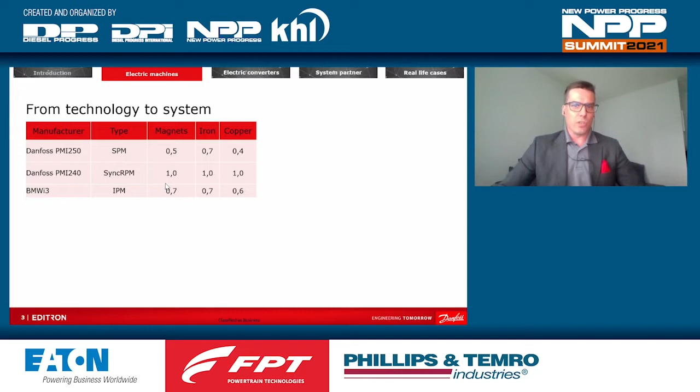So just the basics of what you can see here: the first one is a surface magnet motor where the magnets are on top. The second one is an area where you really use the iron reluctance, and the BMW one is also a similar type to that.

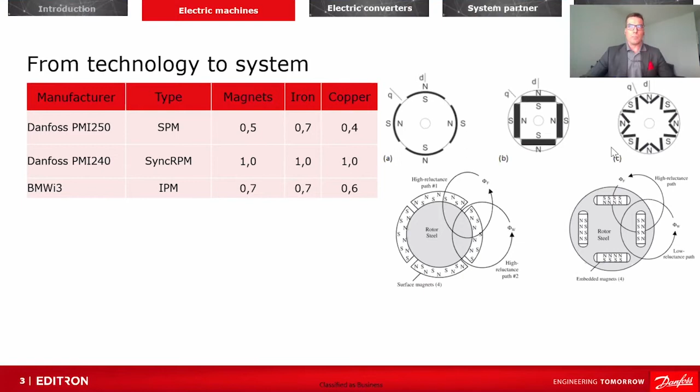When we look at the different behaviors, you can see there is a peak power that is different. As mentioned, the surface mounted permanent magnet machine has the highest peak power for the torque, and then it goes down relatively according to the positions you can see here. Now you could easily say the surface mounted is best if I want the highest peak and don't need the high speed area, but the high torque area.

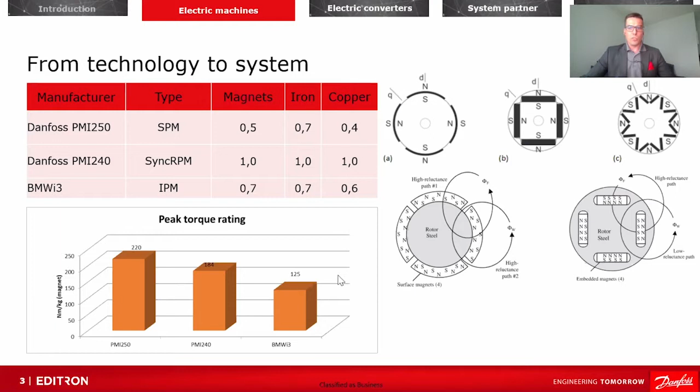Now when we look at the PMI 240, you have the highest area of speed, and also the peak torque through the synchronous reluctance. So you don't need the gearbox if you are able to utilize the system, but you easily then need a bit more current to get all the areas there, so you might need more power electronics to support that.

But the actual system, if you think about it, how many moving parts you have there - that's the simplest one, and it can be used in quite many applications as such, and it's easy to assemble because there's no need of mechanical gearboxes. Of course, there is a reduction gear as well.

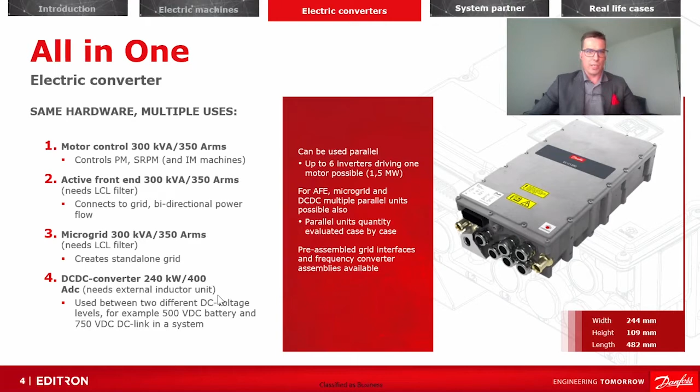This is just to deep dive a little bit into what kind of technology we would need and what the benefit of silicon carbide will bring us. In this particular device, we don't have active silicon carbide components - we have silicon carbide diodes, and we will come down to that point.

Silicon carbide is commonly asked about - should I use it? It's actually the one everybody is speaking about now, and the typical question is whether efficiency is the reason one would use it. At Danfoss, we have a capability of vertical integration - we actually have our own power modules and the capability to produce our own power modules. So we are at the moment the only company capable of starting from the silicon up to the full system. We really deep dive into these areas in the company.

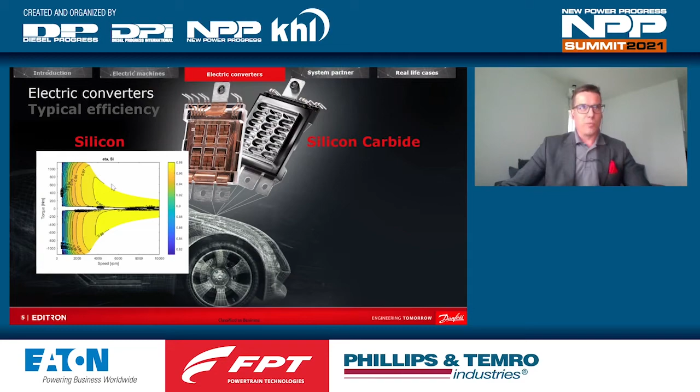Let's start firstly on the standard silicon. So we are talking about this area here, which is the efficiency area where it's typically used. You can see the standard silicon is about 98, 97% efficiency, what you can have. And then it drops down when we go lower in the speed which we are using.

Now when we have a silicon carbide addition there, you can see that the area of 98% efficiency is larger. So we can say, yes, it is better - it's clearly better for the area, and it's also larger for the bigger efficiency area. Now one could say, okay, let's take the silicon carbide because we save in efficiency. But you need to remember silicon carbide is more expensive because it has carbon added to the silicon, so it's more expensive to produce.

But of course, you get a little bit more efficiency there. If you have a 100 kilowatt system and you save 1% unit, it means you have 1 kilowatt difference. So does it pay back in your application if you are only basing it on the efficiency difference of these two products? Should you go there? The answer is typically no - the efficiency of the single component is not enough to justify it. You need to understand where to use the actual part and how to utilize the benefits.

And that's when we come to the passive components - that's the actual area where the value of silicon carbide comes out. Because we have the higher efficiency, we are capable of increasing the switching frequencies of the switches we have there, and increasing the switching frequency will allow us to use much smaller components on the passive side.

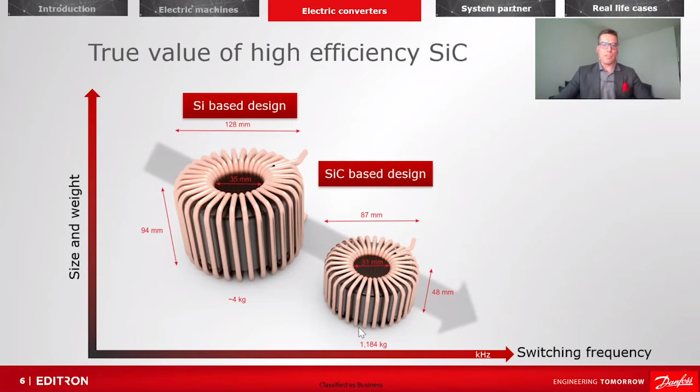What I want to say on these ones, to get the best system for your applications, you really need to find a partner that knows these technologies, can support you with the technologies, and analyze the duty cycles of the systems to come.

Okay, I'm back, as one famous movie star has been saying. Sorry for that, I have a big storm here, so it's blocking the network a little bit.

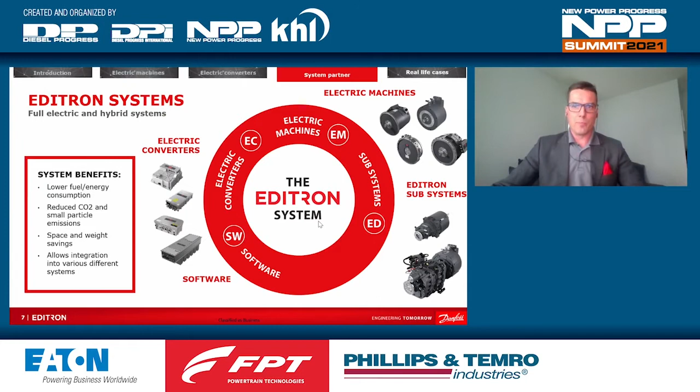But as I said, the systems are the important one, and the partner for the system is really, really important to select - to be the one who understands the electric parts and how to utilize the components and the right technologies behind it to come out with the best total cost of ownership for the end customer. This is a key to success in this area, because there is no one technology that wins it all. That's important to remember. Okay, let's go to some real life cases.

As we want to understand the full application and really understand what we can do, we have a capability in Danfoss to build full machines. We have application development centers on all continents, one in US, one in Europe, and one in China. And in these ones, we build actually full machines and change them to use any of the technologies from Danfoss.

One of these is a wheel loader that we changed from hydraulic version, diesel driven, to electric driven, where we also drive the hydraulics with electric motors. This is the most modern, really the brand new version coming out from the market so we get a fair comparison. I will not go into details.

You can find this machine, it's publicly known. Any customer, any partner can come and see. And when the world is allowing it, you can visit - this is in the Nordborg Application Development Center - and you can even get a test drive and understand. We show openly all the technologies that are used there and how it is built.

But what is important to understand, when you select the technology correctly, the actual power utilization, the energy consumption of the system really comes down. And also that it's already possible to build systems where you can operate a full day of duty cycles with this kind of machine.

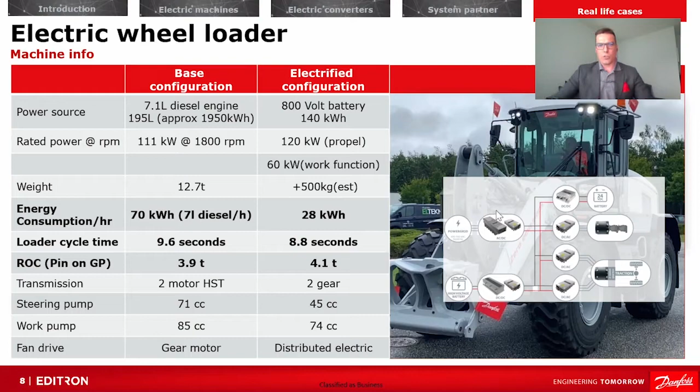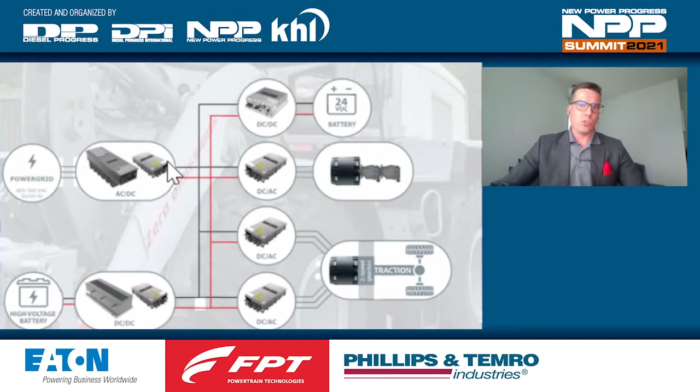What we went through to understand what kind of motor technologies you want to use there, and what kind of technologies inside the power converters you have there, really will bring out what is the total cost of it, and also what is the outcome in total cost of ownership when you are using it. So let's go to the next one.

I just wanted to add here one of our customer cases, which is a really interesting one - this is Spierings mobile cranes. They have been now one year out with this application, where you have a machine which is driven with electrics. It can also use a hybrid, so it has a diesel engine. And here we came out with the solution that it needs a 2-speed gearbox.

Then it has all the applications that you have here. So when it comes to the construction side, you can use it fully electrically. Because these are typically used in city centers, they really want to have the opportunity to have a silent operation mode for the full time that it's there. It's now really running, and the customers are just enjoying it, and it's working perfectly.

The few things we needed to understand here: how fast you actually want to go and drive with the electric mode. And you can find here that the outcome was actually that it doesn't really need a higher speed, 80 kilometers per hour, to go there with the full electric mode, because that would make the system quite much more expensive to make it full range.

When we are going and moving from city to another, or from construction site to another construction site, we can drive in a hybrid mode. And when we are at the site, it's totally fine if we can operate and drive it inside 30 kilometers, 50 kilometers per hour. No problem at all.

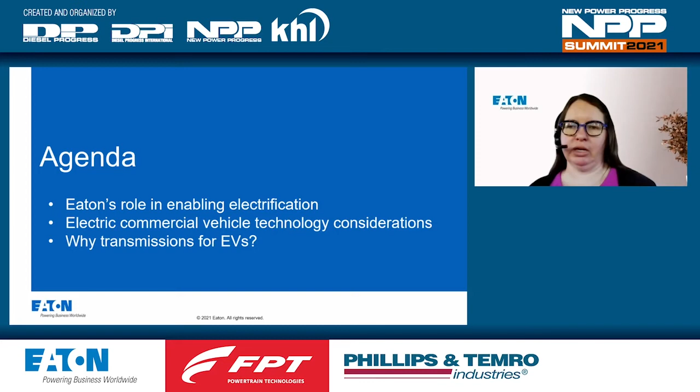Eaton started our e-mobility segment 3 years ago, so we're just up on our 3-year anniversary. What e-mobility did is bring together segments of Eaton that were previously in our industrial sector and previously within our electrical sector into the e-mobility group. This group is really experienced with vehicle dynamics due to a long history in truck transmissions, axles, and a lot of the different things Eaton's been involved in over the years. And then it pulled in our electrical segment. Some of you may not know, but Eaton has a huge product line within electrical. Almost any commercial building you walk into today is probably going to have a power panel that says Eaton on it, with Eaton's electric circuit protection. So just like Eaton's been protecting high voltage in our offices and homes, we're bringing that expertise into this e-mobility space for vehicles.

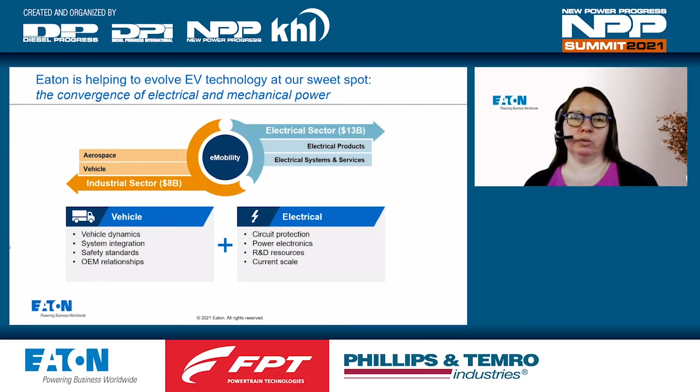When we look at what part of the vehicle Eaton is really looking to specialize in with the e-mobility group, we're really looking at power electronics - how do we manage the electrical power on the vehicle - and then power distribution. Just like those circuit panels in your house or office, we're focused on how we distribute that high voltage power safely and reliably within the vehicle, keeping high voltage separate from low voltage while everything works together. In addition, we're focused on power systems, which is really what my group is doing, managing power in the vehicle to get from our tractive device out to our wheels, and also focused on gearing. The areas Eaton is not focused on are HVAC and thermal management - there's lots of people that do that space really well, that's not an area we're focused on. Energy storage, the batteries themselves, or hydrogen as our earlier speaker talked about, we're not focused on that type of storage. And additionally, just like my friend from Danfoss, Kimmo, was speaking about traction motors, that is not a space where Eaton is currently focused on.

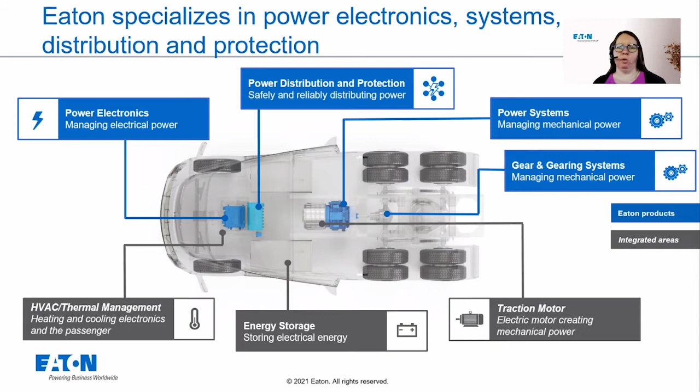So let's talk a bit more about where Eaton thinks electric commercial vehicles make sense. This is the question we all ask ourselves - we've been in this industry for a while, some of us are new, but where do commercial vehicles and electric really cross paths? What we're looking at is pickup and delivery - think city delivery, beverage distributors, regional haul, those folks that start and stop from the same distribution center every day.

Buses, we've absolutely seen electric buses take off in other regions. We know that electric is expanding in Europe and the United States. So really any type of bus market, it could be a city transit, shuttle bus, school bus, tourist buses, or our favorite, the bus you get on at the airport to get to your rental car location. Those are the types of buses that have set routes, they always go back to the same place.

Regional haul is the other area I mentioned, kind of goes along with pickup and delivery. We're also seeing more interest in the municipal market, so when we talk about street sweepers, water sprayers, and city dump trucks, again those are day trip type vehicles, they go out for a time and then always come back and have a chance to recharge.

Port drayage and yard tractors on the bottom of the screen, those two really go together. We're seeing a really big emphasis on the ports, especially with what's going on in California. There are a lot of initiatives to try to get the diesel vehicles out of those regions and have cleaner air and a cleaner environment. With the things going on today in the electric market, we've got the ability to go do port drayage and yard tractors.

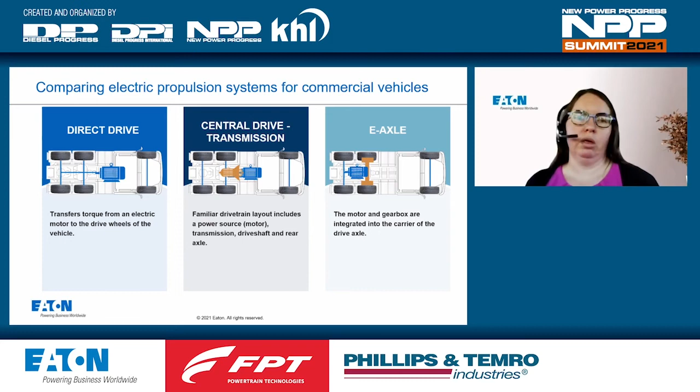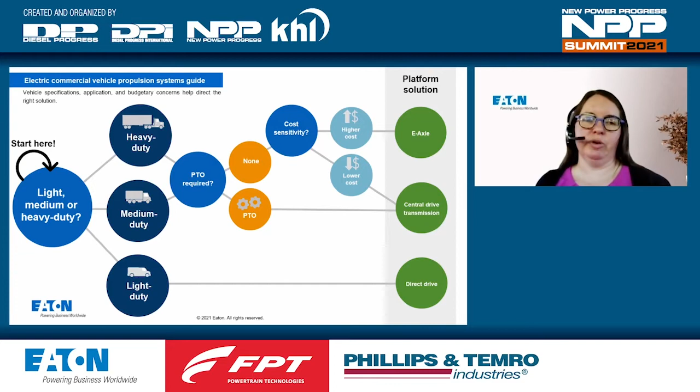But then I know we've had a lot of discussion about off-road. So I'm going to throw in another slide and say, hey, wait a minute, you need a PTO to run something that's really high power, where I'm going to use most of my torque from my electric motor, or that I would have used my diesel engine to provide. If I need a PTO and I want to use PTOs that are readily available on the market today, then that's going to push heavy duty and medium duty both toward a central drive architecture as probably your best solution. If you don't have a PTO, it gets us back to our cost sensitivity question from the previous slide. So I hope this gives us all a little bit of an idea about how I'd start making this decision.

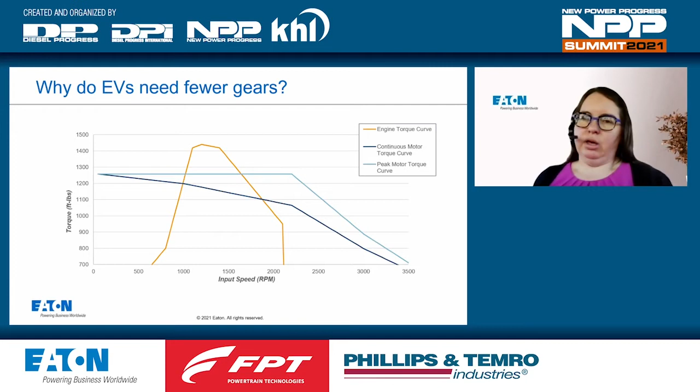The next thing I want to talk about is gears. A lot of us are familiar with our conventional engine space, where we have 12 gears, 10 gears, 18 gears. I'm doing an EV transmission right now for the heavy duty space, and it uses 4. So why do I need fewer gears?

The answer comes in when we look at a torque curve between an engine and an electric motor. The orange line here in the middle is a typical engine torque curve. My peak torque is around 1200 RPM in this example. But if I look at my electric motor torque curve, I've got peak and continuous. Just remember the only difference: peak is the maximum my motor can put out, and continuous is what my motor can put out every day, all the time, no issues, without worrying about overheating.

So that's my torque curves. I always have peak torque starting really at zero speed out to a high RPM, in this example around 2200 RPM. The other difference between diesel engines and electric motors is that in my diesel engine, my peak efficiency is around the middle of my peak torque range. On electric motors, my peak efficiency is at my highest RPM that motor can run to. This drives some different technology and decision points that we have in electric vehicles that we didn't have in conventional engines.

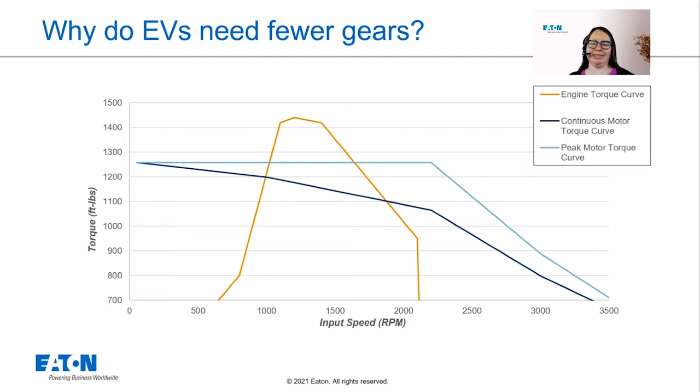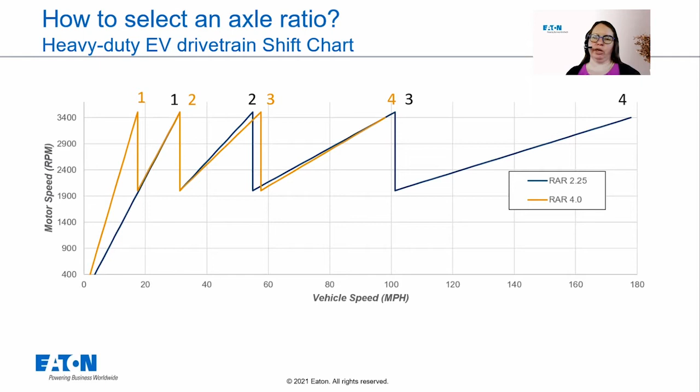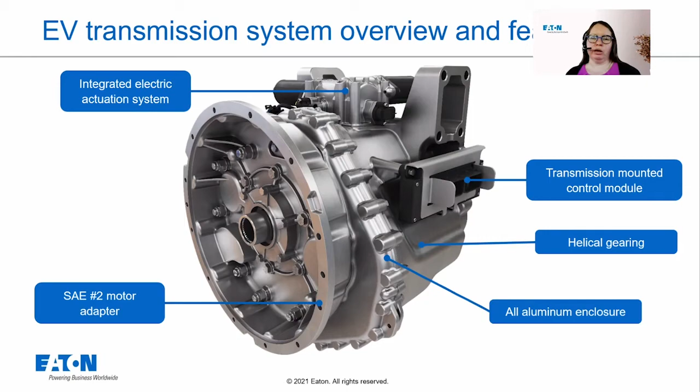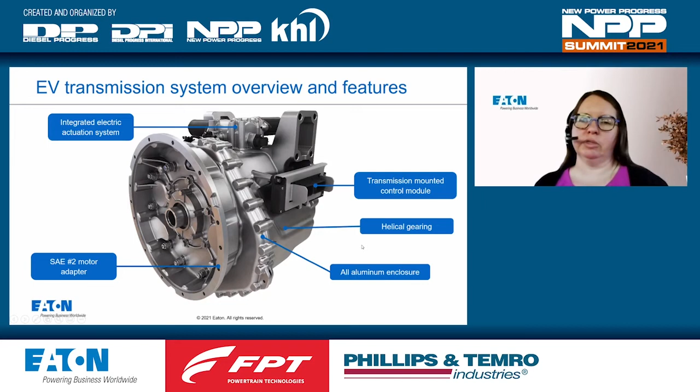So this is just a quick overview of the new heavy duty EV transmission that Eaton's working on. This is a full aluminum housing transmission. As we talked about, this is a 4-speed transmission. We're trying to do a common motor adapter, so this would work with anybody's motor that might be out on the market today, with potentially a couple changes on their side. We're also going with helical gears to make sure we've got as quiet a transmission as we can in these electric vehicles.

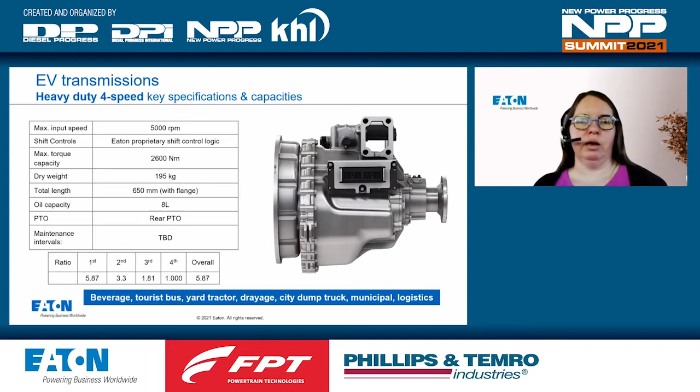Just a quick overview of what this heavy duty transmission can do. Maximum input speed is 5,000 RPM, 2,600 Newton meter torque capacity. Trying to keep it light, we're at 195 kilograms, and ratios from 5.87 up to a direct of 1:1. This is really targeting that class 7 and 8 market.

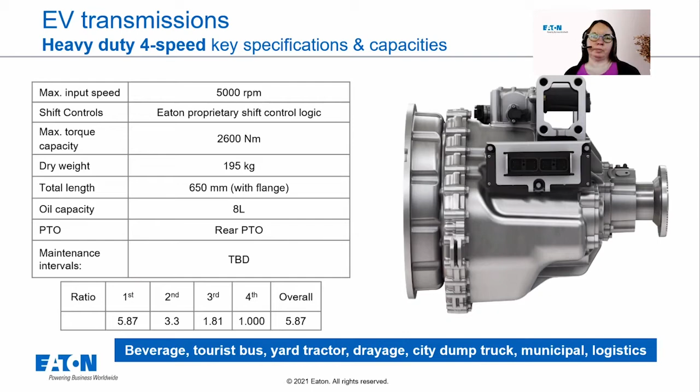Eaton's got a whole bunch of different transmissions in our portfolio. This is absolutely available out on Eaton's website. But really the two primary transmissions that we're focused on today is our medium duty EV 4-speed and then the new heavy duty EV 4-speed.

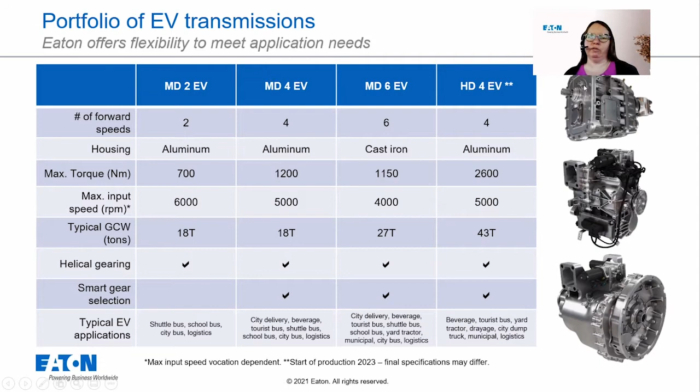And then what's next, right? So it's a transmission, central drive, future state. We're looking for ISO 26262. We're looking at cybersecurity, we're looking at UDS, so the Unified Diagnostic Services, and OTAP, so over-the-air programming. So Eaton's doing what we're doing now, plus we're also looking to the future and saying, hey, what other technology do we need to be in our product so we're ready when our customers are?

And that's what I had to share with you today. I would love to hear any questions from the audience. That's great, thanks Julie, it's a really interesting presentation. Not surprisingly, we do have a few questions, if I can put some of them to you.

One question is, from a power transmission side, is there any difference between a battery electric vehicle and a fuel cell vehicle? There really isn't. So when we talk about Eaton and our XEV portfolio, it's what does the X mean to you? It could be a fuel cell, could be a battery electric, could be a range extended electric, but we're really looking in that drivetrain. That's electric motor direct to the transmission.

Another person asks, what sort of maintenance or maintenance cycles are required for vehicles with the 3 different types of vehicle architectures? And they ask how much additional training of maintenance technicians is needed. That is a great question, and I'm going to go on a little bit of a limb to answer part of that. So direct drive, I would say that would probably have the least amount of maintenance, but you are dealing with that electric motor and high voltage. So we want to make sure that anybody working on an electric or hybrid electric vehicle has the correct high voltage safety training. That's very, very important. We need to make sure that all of our people are safe every day.

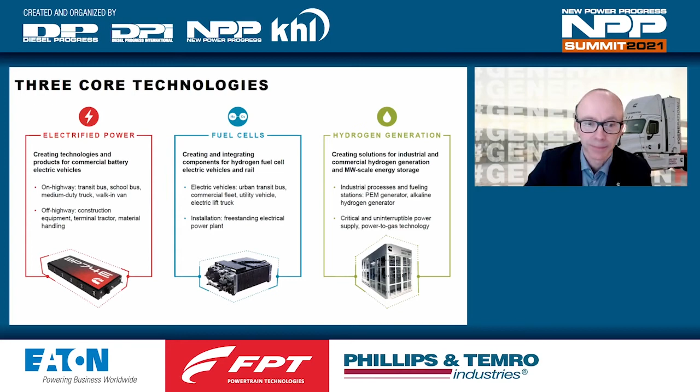But when you compare that to the 1.3 million engines per year I showed earlier, you can see we have a long way to go—we're right at the front end of this industry. So this is a real growth opportunity as we transition from diesel and gas solutions to both hydrogen and battery electric vehicles. This is an exciting time to be at the start of this.

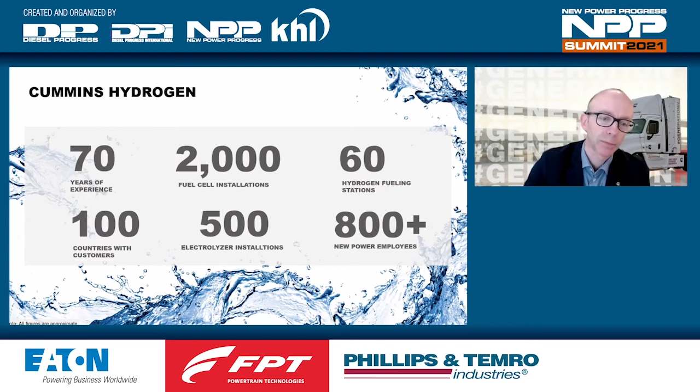The European Green Deal has stated that the transport sector needs to cut greenhouse gas emissions by 90% by 2050, based on a 1990 baseline. As we think about the solution to this decarbonisation challenge, it's clear this is going to be a blend of technical solutions.

For over 20 years I've spent my career in diesel improvements, meeting regulations on criteria pollutants such as NOx and also greenhouse gas CO2. Diesel has come a tremendously long way and is going to continue to be part of the future solution, certainly in the short to medium term. But if we're really going to achieve these fundamental challenges of climate change and carbon neutrality, then zero emission vehicle solutions are clearly needed to address this.

Both battery electric vehicles and fuel cell powertrains, combined with batteries, are going to play a key role in future freight transportation solutions. Both offer advantages and challenges, and both are still quite early in their technology maturity curves, but are progressing very quickly and moving fast.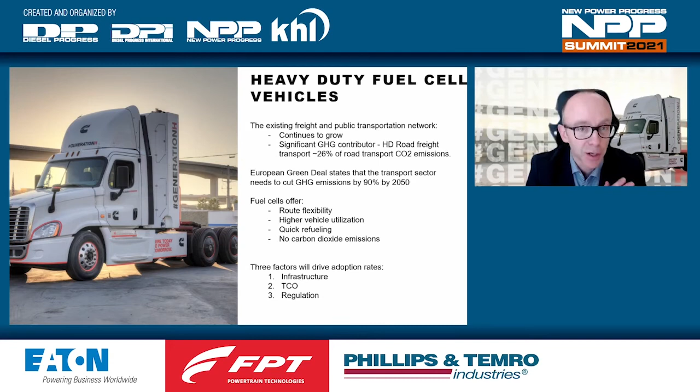Whilst we as tier one suppliers and OEMs can influence some of these factors in development and R&D, there's a real need, we think, for clear, ambitious policies to support the attainment of these ambitious greenhouse gas targets and drive us to more cost-effective technology solutions that are most importantly adopted by users.

So if we think about the policies required for the transition, I really break these out into three areas: infrastructure, development, and deployment. We are pleased to see so many governments act over the past year to produce hydrogen strategies. This includes the European Union, France, Spain, Belgium, and Germany. I really hope that as we develop these hydrogen strategies across more regions and countries, they focus on these three areas of support.

In the infrastructure space, it's needed to ensure our systems can support the adoption of hydrogen and fuel cell technology economy-wide. Government investment in infrastructure sends a very strong signal to industry that this transition is happening and creates more certainty for investment. A focused drive is needed to increase investment in hydrogen fueling stations suitable for our heavy-duty vehicles, so we have good geographic coverage addressing both regional and long-haul driving, where we think fuel cells are going to be a really important technology.

We really need to see a build-out of the network of fueling sites to enable wide-scale application of hydrogen heavy-duty trucks with compressed hydrogen, either 300, 350 or 700 bar application, to match the tank pressures we currently have.

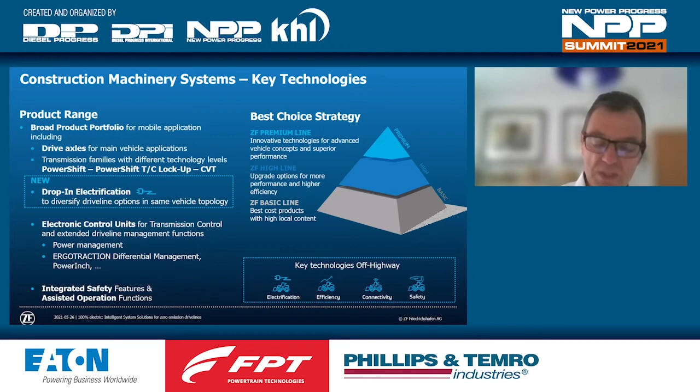So the question is, what is the right solution? When we asked this question, we started a comprehensive study looking at all different technology solutions. We modeled a large number of systems with traction drives and working hydraulics for our target application and ran detailed analysis on a set of multiple criteria.

So the baseline had always been our current products: the power shift transmission, the power shift transmission with torque converter lockup—these are the two first bars—or the hydrostatic mechanical power shift, power split CVT, the green bar.

In the following, I will just refer to a comparison of the energy demand from the tank to the wheel as the key differentiator for the assessment of the single concepts. The baseline shows already that there is significant saving potential with the CVT in energy consumption.

But if we now move forward, one of the key questions we asked ourselves was, what kind of contribution could a hybrid be? Hybrids are considered to be a potential solution for many applications, so we looked at that right away.

And what we found was that parallel or serial hybrid architectures can reduce the energy demand. However, the fuel consumption reduction potential is rather small compared to the additional system complexity required. So we are looking at about 10% if you just look at the power shift torque converter lockup system, or an additional 5% if we make a hybrid solution based on a CVT.

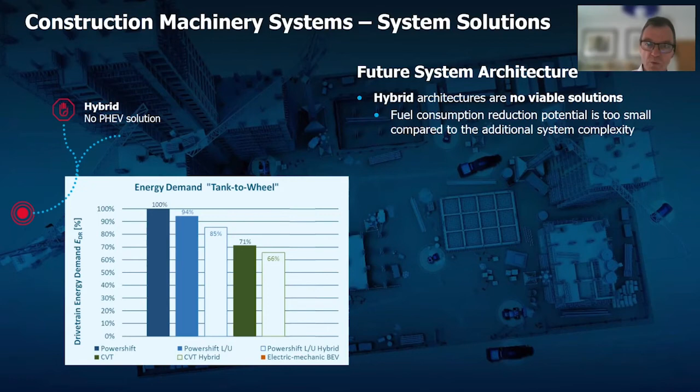With that poor cost-benefit ratio, we also question if the total cost of ownership for a hybrid solution for our target application is really sufficient. And from our analysis and conclusion, we do not see hybrids as a viable solution when moving towards electrification.

So at the end, we selected the full electric system, and we see here on the numbers on the energy demand, we analyzed a 36% energy demand compared to the 100% represented by a standard power shift transmission.

And beside that significant potential in reduction of consumption, it's also the only solution which does fulfill the requirements for zero emission. And that was the reason that we concentrated, or will concentrate, on this solution.

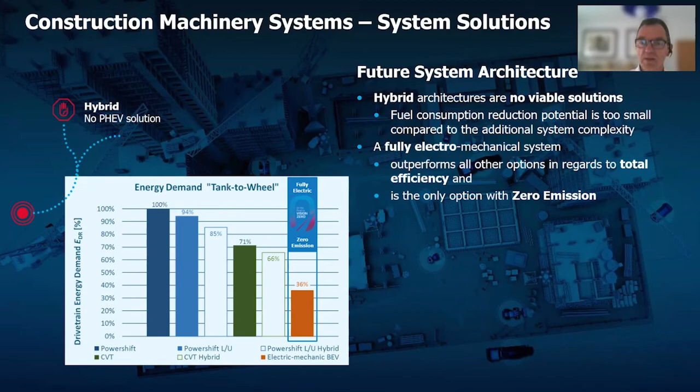With the same models, we also looked at the different driveline configurations, and we had seen examples of that in the sessions before. Our conclusion was that for construction machinery, the central drive is the preferred solution.

That means only one electromechanical system in the vehicle. Due to the specific performance requirements of construction machinery, a distributed system would have very similar power requirements. We have to have 100% of the torque at the front or the rear axle, so a distributed system would have the same power requirements as the central drive.

And consequently higher system cost, because we have to have a second motor, second inverter, etc. Also, we need in any case mechanical transmissions to realize the performance of the vehicle, either for max traction when we are in breakout or working conditions, but also for maximum vehicle speed.

So we need transmission concepts to be optimized to create the best balance between performance, efficiency, component sizing, and system integration. For example, for bigger machines, we for sure see also in the future the need for multi-gear transmissions to have an optimized system.

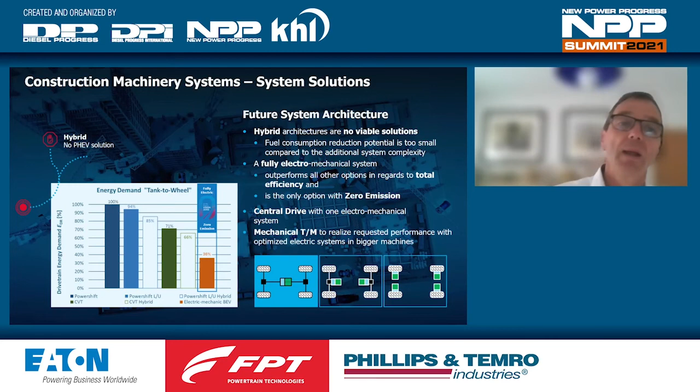So our road to Vision Zero means zero emission clearly starts here at the left side. We excluded the hybrid solution. We are driven by zero emissions to support the focus on the environment.

We are focused to have drop-in solutions, to use existing vehicle architectures to have really the opportunity to have an optional solution while maintaining the conventional drives.

We rely on modular platforms with a high degree of reuse, which are scalable and flexible. We for sure would like to reuse the tools, the functions we have developed, the control strategies from past applications, and with that be ready for launching our electrified drivelines.

Baseline for that is the application know-how and system competence we do have, but that's also what we have learned during that analysis. It's not only a component focus we need to have. We have to focus on the complete system, on the complete vehicle in order to optimize an electrified drivetrain.

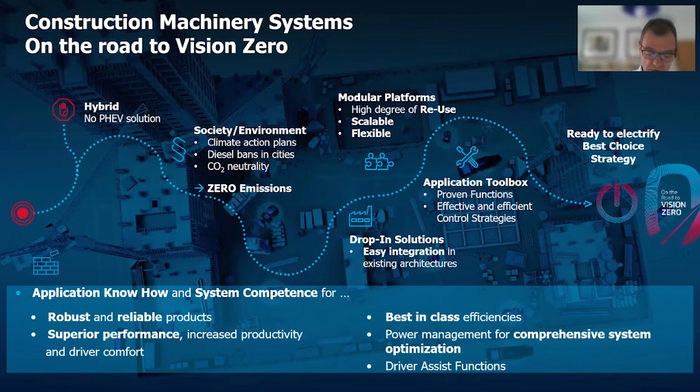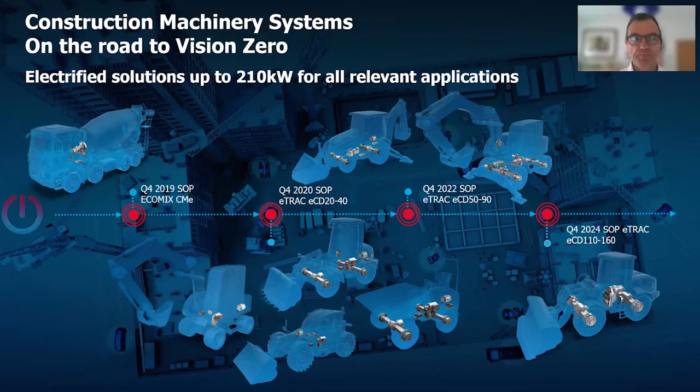So if you look on a product lineup, we do have electrified solutions up to 210 kilowatts in production, respectively on the way. We started in 2019 with an electrified mixer drive for concrete mixer. We have launched last year the electrified drives for compact equipment, compact wheel loader, other small equipment.

We are in the process now to move it to the next power range, mid-size units up to 100 kilowatt, and our midterm target is to introduce electrified drivetrain, for example, medium wheel loaders up to 20 ton, until end of 2024.

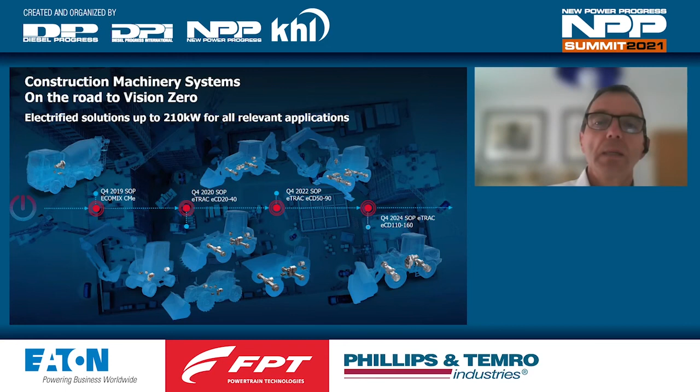If you look at the platforms necessary in order to cover that applications, it's several different platforms which are scalable in different power ranges. We serve different voltage levels. That is just an example, there's not one solution which fits all. So we have different concepts. We are coming from air-cooled for the smaller vehicles, engines, to liquid-cooled.

We have ASM motors, PSM motors, transmission 1-speed, 2-speed, 3-speed. We have remote-mounted ePTOs and integrated PTOs. So we have a complete platform where we can build the adequate and the right solution for the different applications.

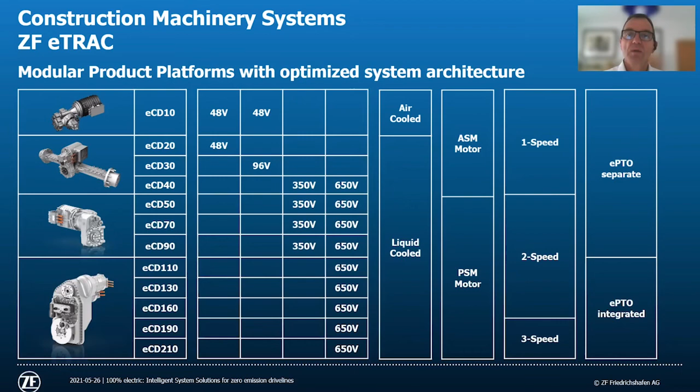So, as mentioned, a complete product family up to 210 kilowatt, a modular product platform which is scalable. We achieve the same performances as the conventional drives. The solutions are drop-in, so interchangeable with a basic vehicle layout. And we do have an electronic drive control with a sophisticated torque control strategy and efficient power management for the traction drive and the working hydraulics.

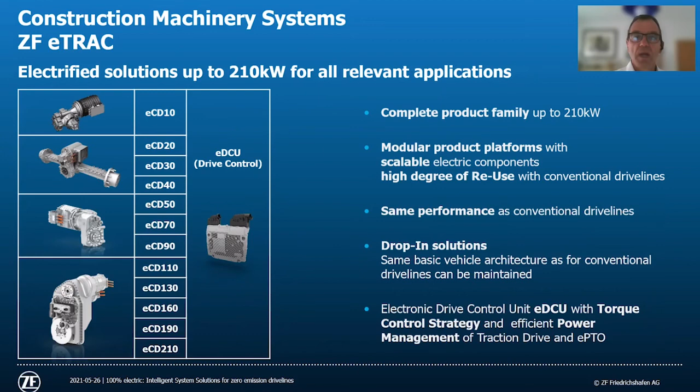And we now just go through some of the solutions already presented, and that is the mixer drive, conventional, electrified. The electrified motor solution has the same performance data as the conventional one. It shares the same interface to the vehicle. We just see here in the light gray this additional e-motor and an additional gear ratio we need in order to set up to this application.

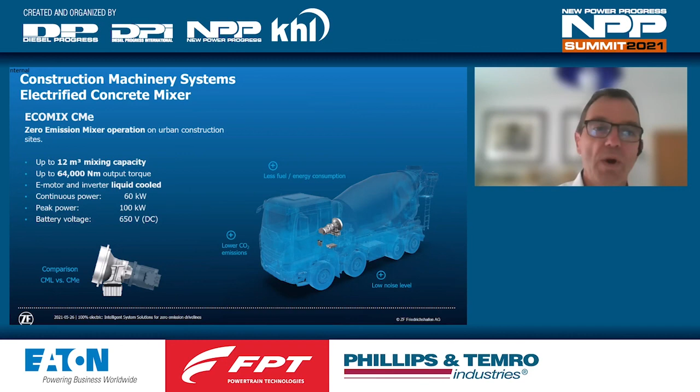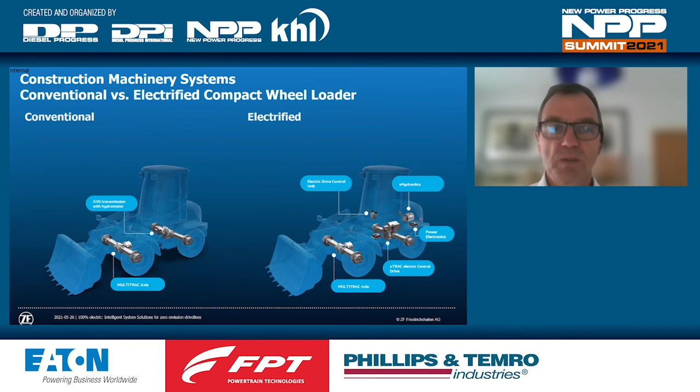And very similar on the compact wheel loader standard, the conventional driveline, the electrified one using the same or basically the same axles with the integrated transmission drop box and the attached motor, the remote mount ePTO solution. And we have there a product range which supports 4 to 8 ton vehicles with different scaled motors, voltages from 48 to 650 volt, and power ranges up to 40 kilowatts.

And I think the main focus here on this compact wheel loader was really to get the maximum out of a 48 volt system, that is a 20 kilowatt continuous power, 40 kilowatt, 36 kilowatt peak, which really from our point of view is best in class for that application.

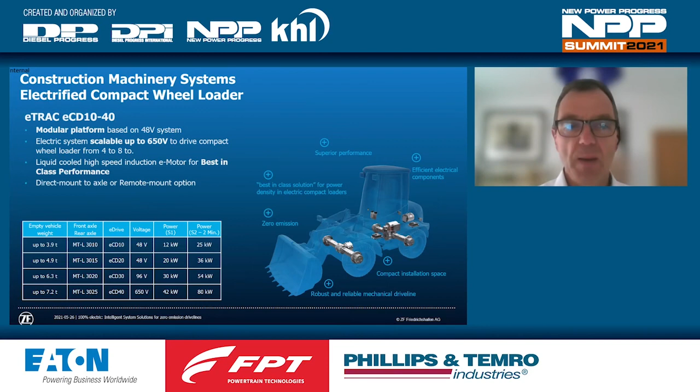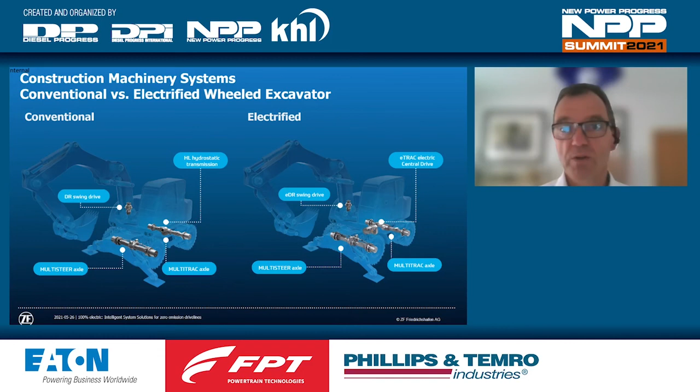And the next product we are just in the process to prepare and launch is an electrified driveline for wheeled excavator. We see the conventional versus the electrified solution. Again, it's a modular platform. Here we use a PSM e-motor.

We have a 2-speed power shift transmission which can be remote mount or direct mount to the axle, an integrated park brake. We have a disconnect so that we are able to support applications as the wheeled excavator, but also others like a backhoe loader, telehandler, which are operating in that power range.

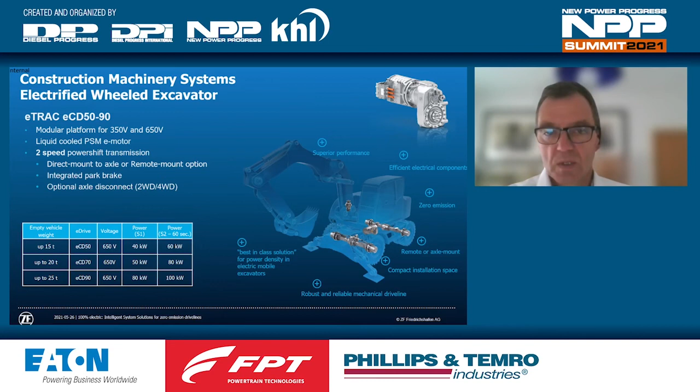So that are the activities focused on our Vision Zero, in that case, zero emissions for the electrification, and also targeted to support and to provide support for a sustainable productivity.